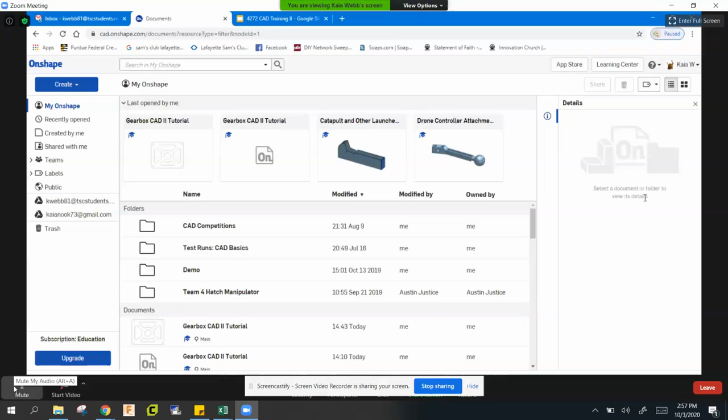So I'm probably going to talk a little bit faster than I did last time, which is fine. And so you can just rewind or rewatch anything if you ever need to do that. And I'll also show you some resources if you need help or if you want to go over keyboard shortcuts. So today we'll be making a plate, pocketing, creating a drawing, and making a small assembly.

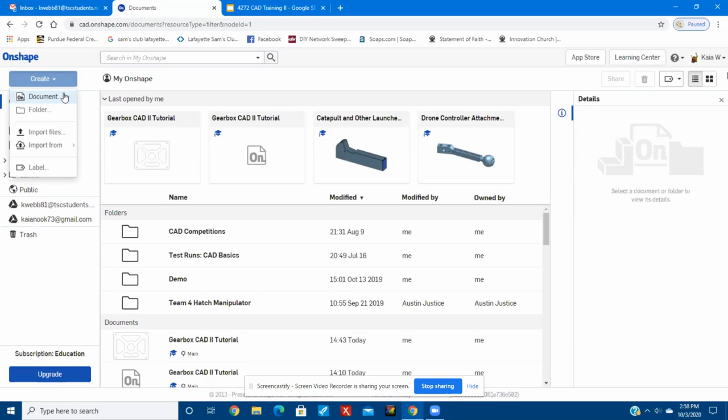First of all, you're going to click this create button up here and go on to document. And this is of course after you've logged into Onshape. So naming is, as I mentioned last time, very important because you can navigate your document, you can understand the purpose of your parts, you can communicate effectively, and you can organize your exports. And by exports, I mean if you save it into your computer, it's going to have the same name as you had in Onshape, which is going to be really easy if you organize it in advance.

So now I'm going to name this Gearbox CAD 2 tutorial. And this effectively communicates its purpose.

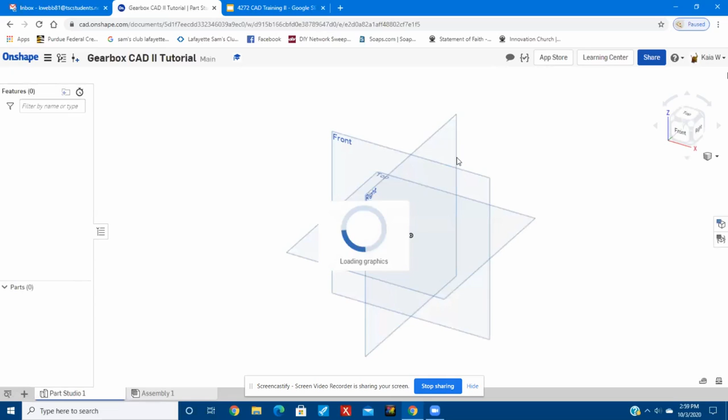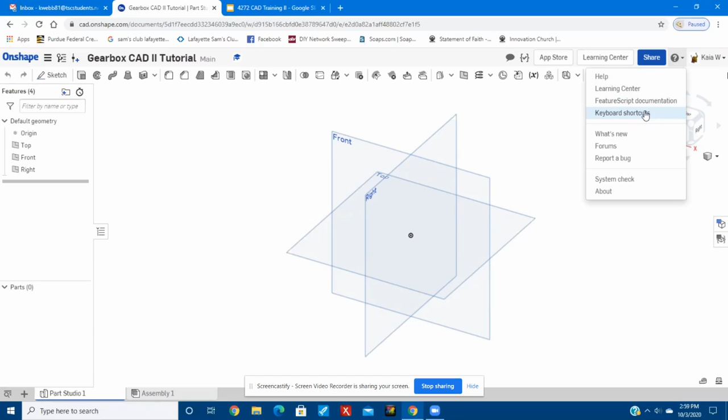And if you don't remember something, there's this little drop-down menu with the question mark in the upper right-hand corner. There's a help thing, which basically tells you everything you could ever need to know about every tool in Onshape. And there's a learning center because Onshape provides its own tutorials. There's also FeatureScript, which you'll probably learn about at some point during build season. And then there's keyboard shortcuts, which are really useful because then you don't have to find the button every time.

What you're going to do now is make the plate in your part studio. So click this sketch button, and then you'll click, I like to use the top plane. Then you'll find top on your cube in the upper right-hand corner, and that'll reorient your view. So now you have kind of a piece of paper. So you'll click this corner rectangle, and you'll click on the origin. I like to have things on the origin just so it defines itself.

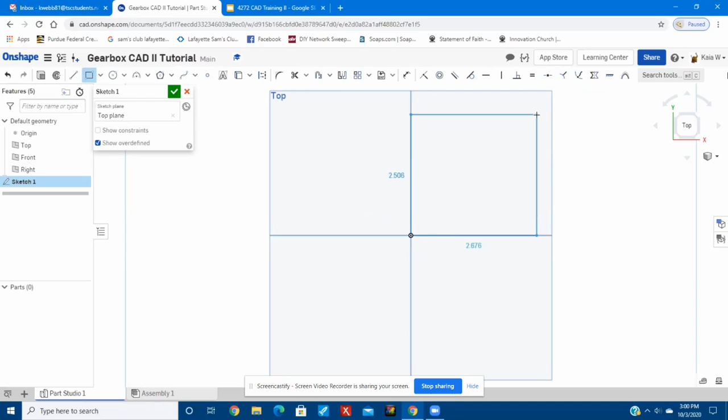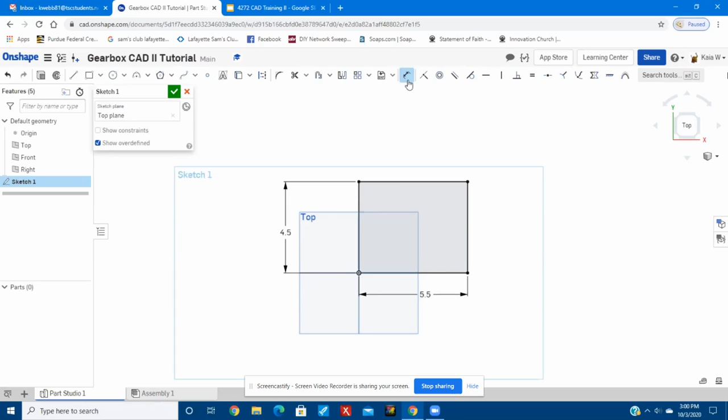And then you're going to make this 5.5. And this 4.5. And if you don't remember, the dimension tool is up here. It's this little arrow thing. So now you have a fully defined rectangle. And you know it's fully defined because it's black.

So now what you'll do is you'll click this center point circle, or you can always click C. And then you'll find the midpoint, which, as I said last time, finding the midpoint of something is just you go along until you find this little box in the middle, and this little kind of character will appear that looks like a point. And then what you'll do is, as I just demonstrated, you don't want to click there.

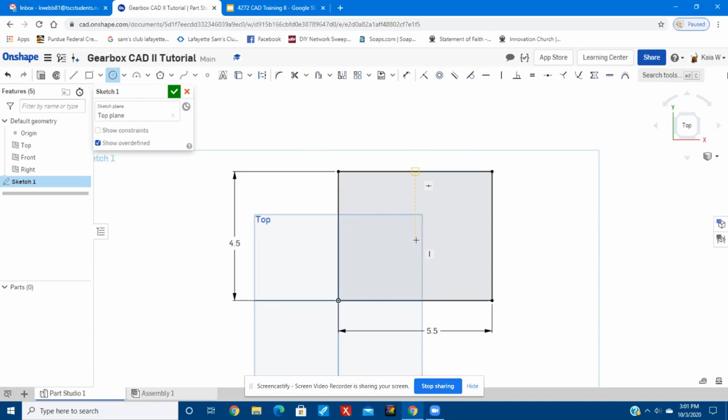So now you'll kind of go down, and as long as that little box is highlighted and there's a line going to your mouse, you can click, and now you have a circle. And then you can drag it up and down, but you can't drag it side to side. So it's centered horizontally, but not vertically.

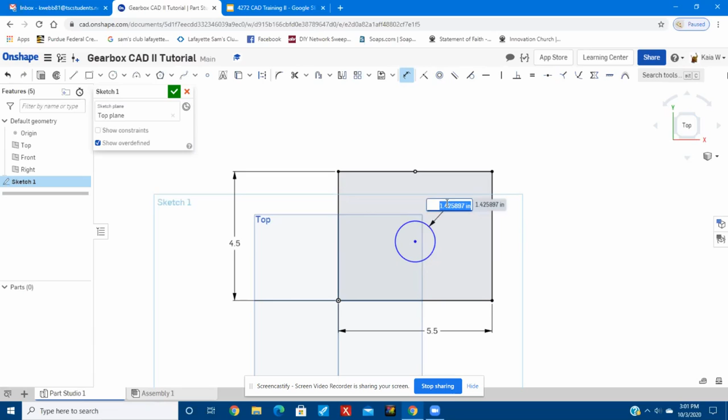So now what you'll want to do is use the dimension tool, and you'll click on your outer edge of your circle, and you'll make that 1.125 in diameter. And then instead of clicking the center point, you'll click the bottom edge, and you'll dimension that from bottom edge to bottom edge of the rectangle to be 1.5 inches, which is very close to what I already had it to. Is it fully constrained? Yes, because it's all black.

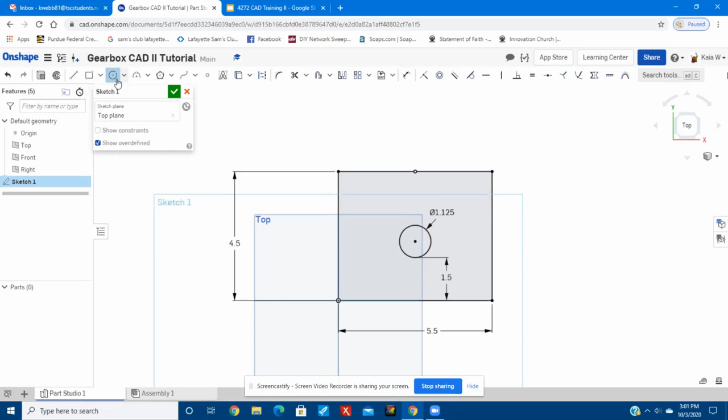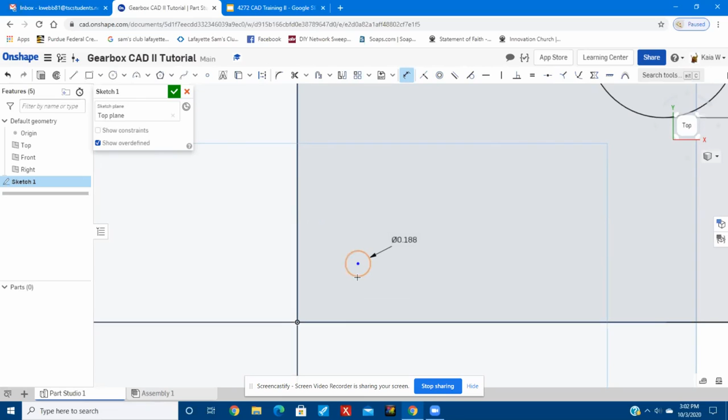So now what you want to do is you click the center point circle again, and then don't make it on the corner, make it somewhere inside the corner. And then let's make this 0.1875, which is the diameter of a screw we have in our shop. It's probably the most common screw size in our shop. Then from edge to bottom edge, I give it a 1/4 inch, so 0.25. And then you'll do that again from edge to side edge. So now we have this circle.

But instead of making this circle in all 3 other corners, you can just mirror it. And what I mean by that is you can kind of reflect it across a line. So what we're going to use as these lines is construction geometry. Construction geometry is ignored when making your sketch into a 3D part, so it's just used as a reference. So this is the construction button, and usually you'll have another tool selected, like say the line, and then you go over to construction, and now you can make a construction line.

I like to use keyboard shortcuts, so I'm going to use L for line, and construction is Q. So you already have this midpoint, so what you're going to do is just click on that, and then go straight down, and it should automatically make it vertical for you. And then see how it wants to make another line for you. Since you're not going to be making another line from this point, you can just click the escape button, and that kind of deselects all your tools.

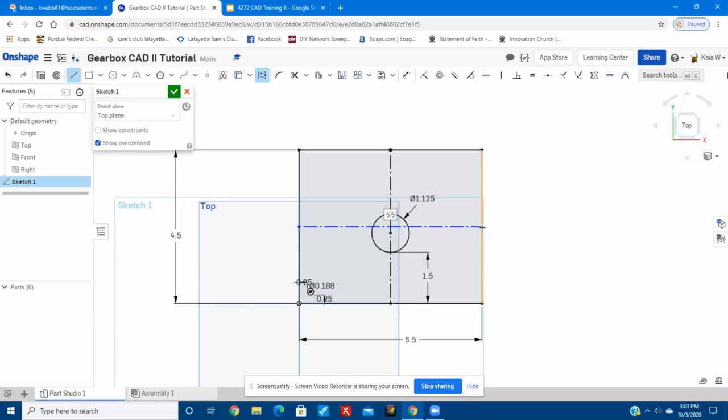So now you're going to make another construction line using LQ or click on these tools. And then you're going to find the midpoint of this side. And then, as you can see, it has it on the midpoint of this other side as well. And then you'll just click escape again. So now you have kind of 4 perfectly symmetrical quadrants of this rectangle.

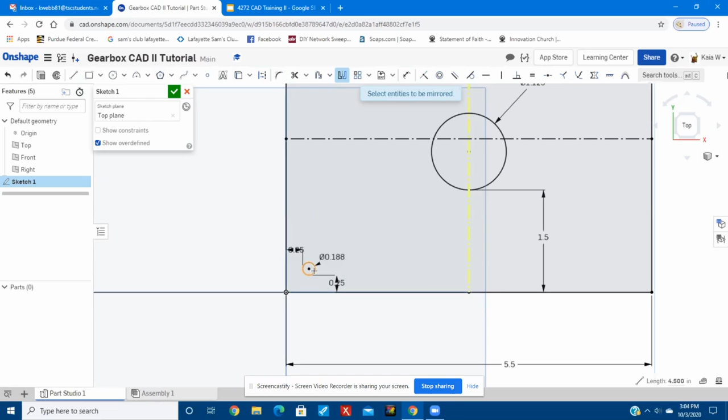So now what you'll want to do is click this mirror tool. And first it'll ask you to select a line and then select an entity, which is just a thing in your sketch, anything. So you don't want to click the point, you want to click the circle because that's the thing you actually want to be replicated. So now you have that, and then you'll click the escape button, and you'll click mirror again, and then you can click this horizontal line. And since you have both, you can do that.

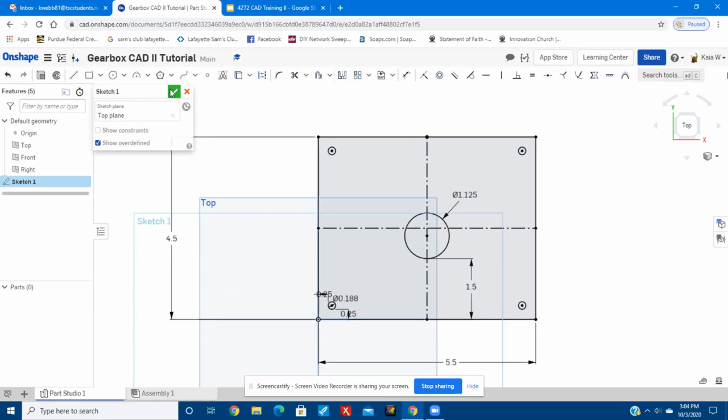And this is only meant for things that are supposed to be symmetrical. So if you wanted this hole to be in here, then you wouldn't be able to do that because the mirror tool would have no purpose in doing that. So now what you want to do is always remember to click the green check mark after you finish a sketch or, let's say, an extrude.

So now you'll click on the extrude button or Shift E, and then you'll click on your face here. And then in this depth field, you want to make it 0.25, which just means 1/4 of an inch thick. So you'll click that check mark. And then generally on parts like plates, you'll want to use the fillet tool, which just looks like a curved corner here. And you'll click on these 4 corner edges.

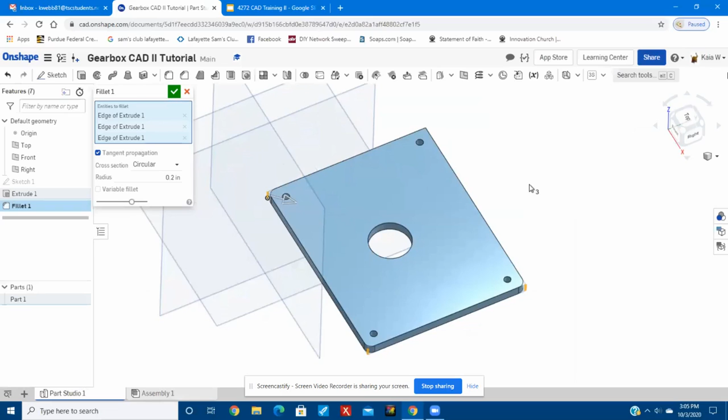And then if you right click and drag, that's how you get it to rotate. And then if you control right click and drag, that's how you get it to pan. So now you want to make sure you have all 4 corners. And I like to use 0.2 because it's just a nice number. So then you'll click the green check mark and you have a part. Now what I'd like you to remember is naming.

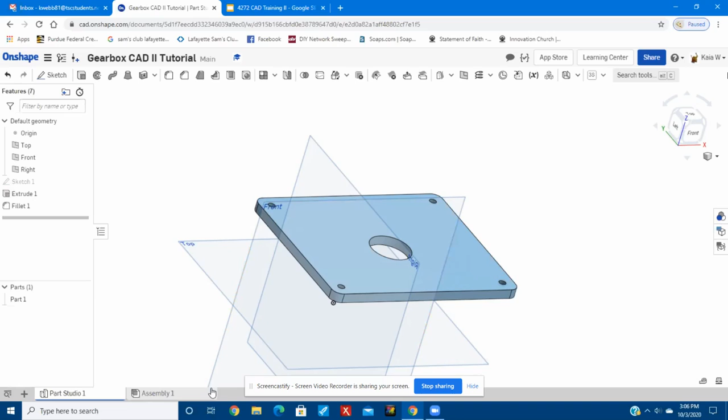So you have the name of your overall file, which includes all of these Part Studios, assemblies or any folders you might have down here. And then this Part Studio, you can technically make multiple parts in this Part Studio. So all the individual parts will show up here. And another Part Studio we're going to make is a Hex Shaft. So you'd probably just name that one Hex Shafts. And then you could make all your different Hex Shafts in one just to keep them together.

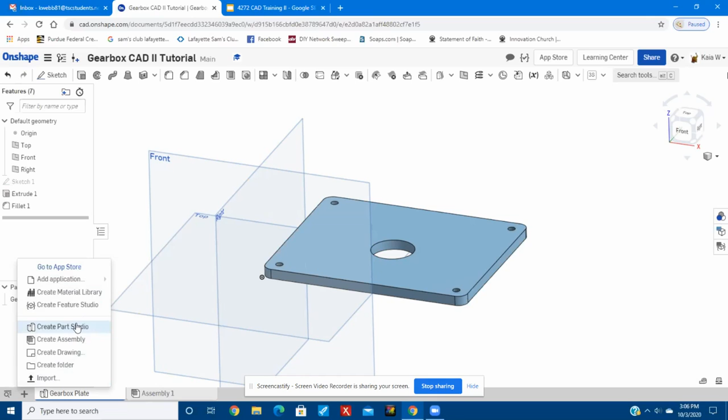But in this case, we just want it to be one thing. So we'll name this one Gearbox Plate. And since it is just one thing, we'll also name this part in here Gearbox Plate. Now what you do is you click this little plus button, which now you can add a new little file in your menu here. So you can create a Part Studio. And then we'll go ahead and name that Hex Shaft. Because in reality, on the team, you would probably be making quite a few Hex Shafts in CAD.

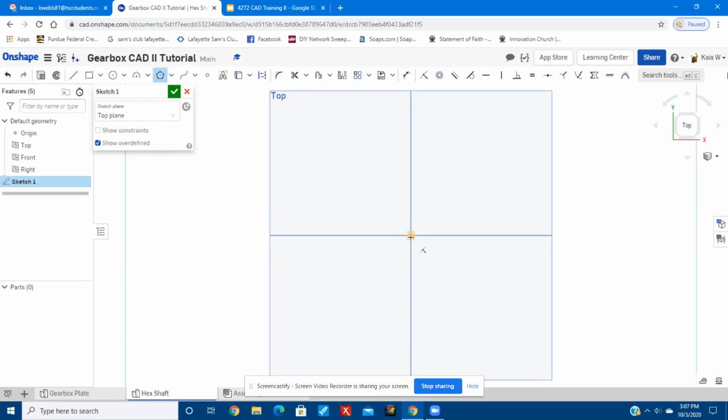So now you're going to click the Sketch button, top, and don't forget to reorient with your little cube in the corner. So now you'll use your Circumscribed Polygon tool and click on the origin. You'll either click to the side or up just to make it easier to define. I like to use up because due to the angle, it's easier to mate in an assembly. So now you'll click, and that little number will appear. If you were to move your mouse, that number would change, and it would change the number of sides. We want it to be 6, so we'll just keep it here.

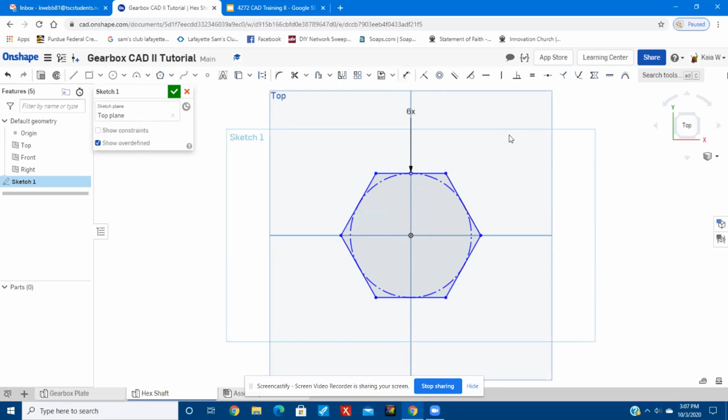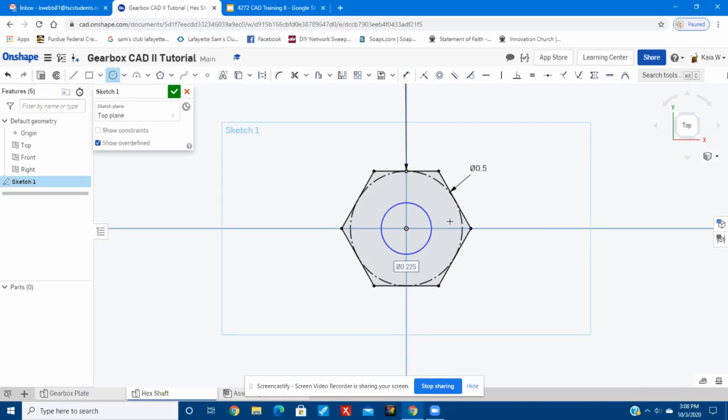And now I like to dimension this circle instead of having to go across, because you can dimension two entities apart from each other, but I just like to use the circle. So we'll make that 0.5, and it obviously got quite a bit smaller. So we'll zoom in, and then you'll make this circle, which will be the hole for the bolt to go through, because we're using this to attach two of our gearbox plates. So now we'll dimension this to be 0.1875. So now it's fully defined, so we can finish our sketch with the green check mark.

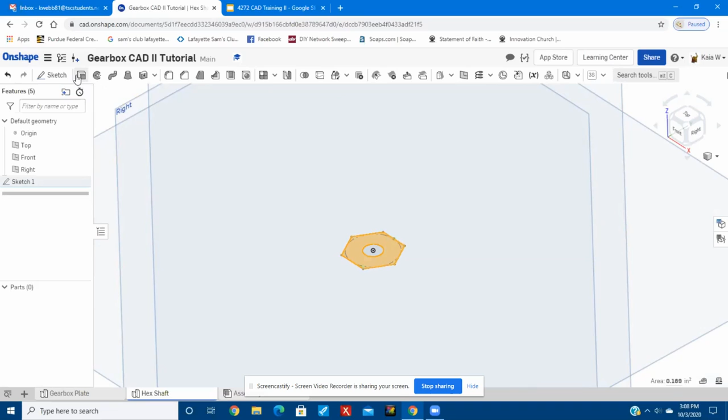And now we have this little hexagon. We can click on that face and click extrude. And then we want this one to be 1.5 inches long. So go to the depth field and type in 1.5.

And I'm not just using random numbers here. So let's look at this part as an example. Most hex shafts we have are 1/2 inch across. And to find length in Onshape, you can click this. So now you know the length of this one line is down here.

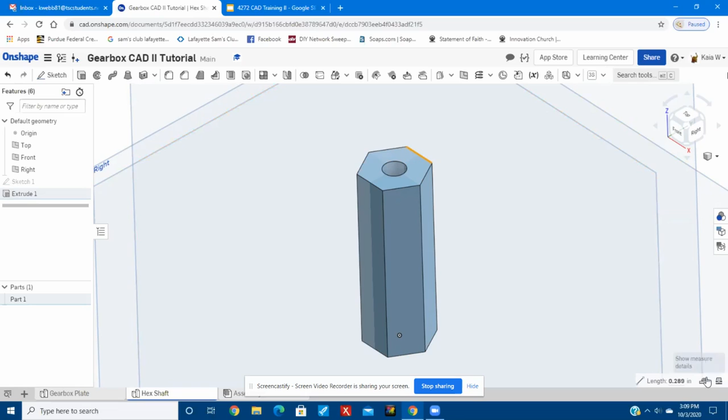And then you can also have show measure details. And then if you were to click another line, it shows the distance between 2 points. So in the event that, let's say, you have a point over here and then a point over here, it would show all those different ways you can measure it down here. So let's exit out of that. And then to deselect everything, you can just click space.

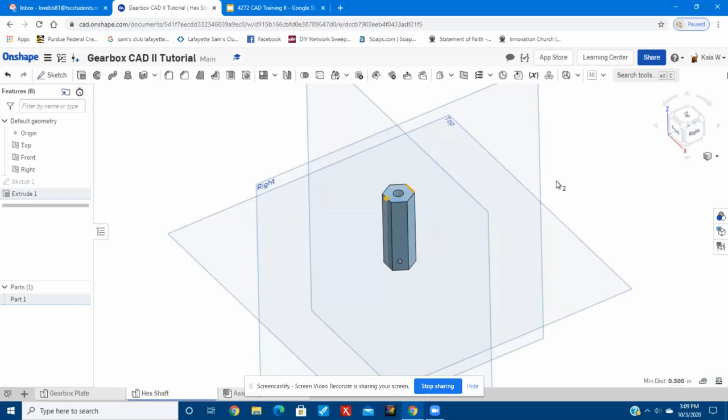And then a very common screw size in our shop is 10-32, which is 0.19 inches in diameter. And this is 0.1875, which is very close. And then 1.5 is approximately the amount of space between the plates in your gearbox I've actually made. So that's what this is for.

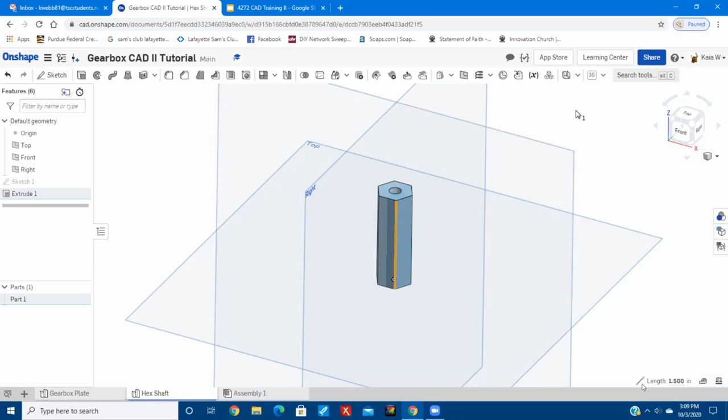Now, let's move on to our assembly. So usually, if you were doing this, you'd create a new assembly. But since we have a very small file, you're just going to go to assembly 1. Now we're going to go ahead and name this gearbox assembly. And you never want to leave something unnamed, because that'll get confusing later.

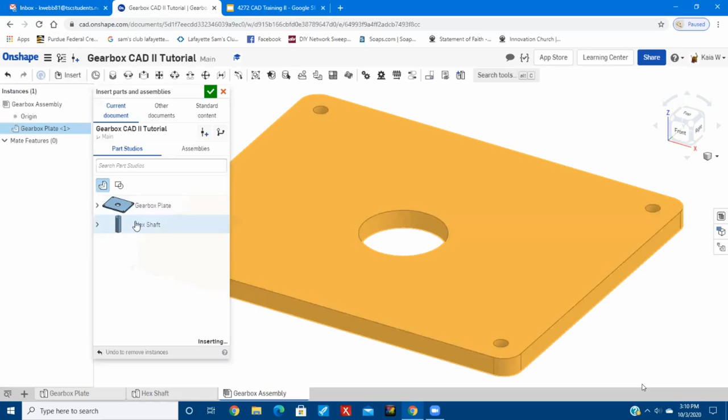So now you go to this insert button, and you'll click your gearbox plate and your hex shaft, which just inserts them. A lot of people like to click and then put it in there, and click and put it in there. You don't necessarily have to do that. You can also drag your parts around.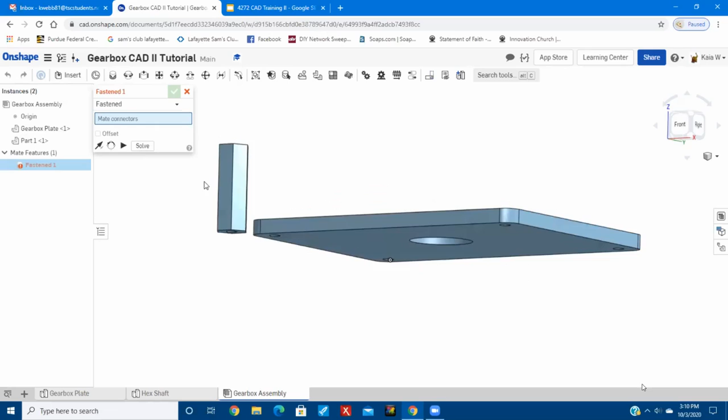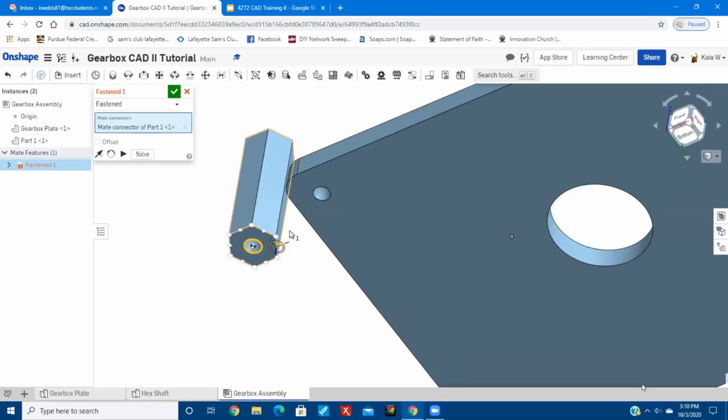So now what I want you to do is use fasten. You're going to scroll into the bottom of this, and instead of having it on this face like I do, see all these little dots? That means it's actually the face. What I want you to do is highlight just this circle, and I'll tell you why in a minute. And you want the colorful icon to be in the actual center of that. So now you'll kind of scroll out and show the top; you can really use any corner. So now use this circle, and you'll want to highlight that edge.

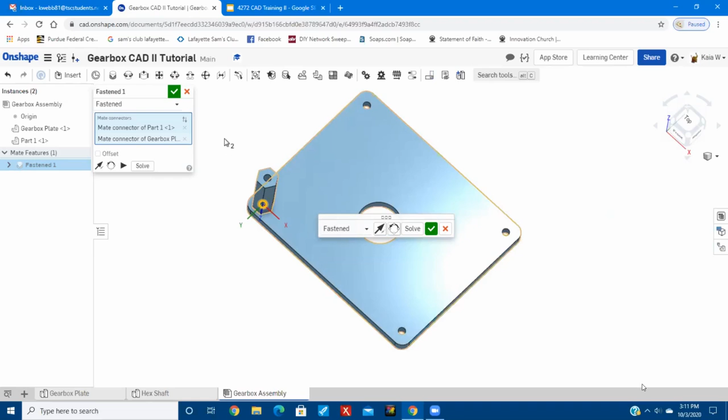So I like to click solve just to make sure everything looks right, but generally in really small assemblies, solve won't do much, but I like to make it a habit. So if you can do that, go ahead and do that. So now we could just take this and insert it 3 more times, or you could just replicate it, which is this little pegboard looking thing up here.

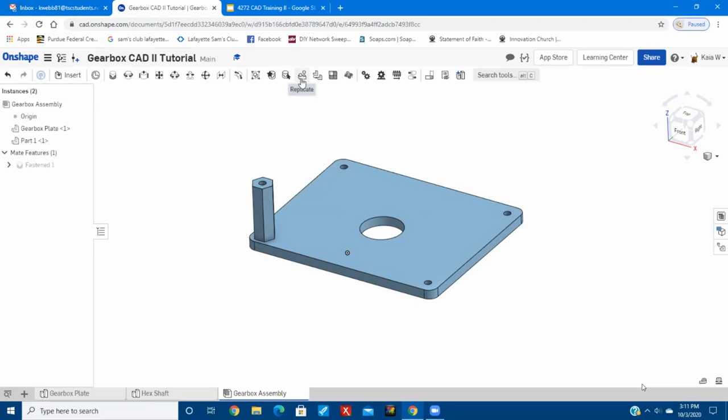So now we click on the thing we want to make multiple times, and it has match edges on face, and that is why I had to click specifically the edge. So it's going to only find the circles that are the same dimension as the thing you already mated it to. So if I had just done it with the face, then it would have said, oh, you want to mate it to all circles. So it would have done this big one too. And it really wouldn't be an issue in this one because you could just delete that one.

But if we have a more complex part, like say the plate on the side of our shooter, it has a lot of holes, and it would probably be even more time consuming just to go through and make sure you only have one on all the holes you want.

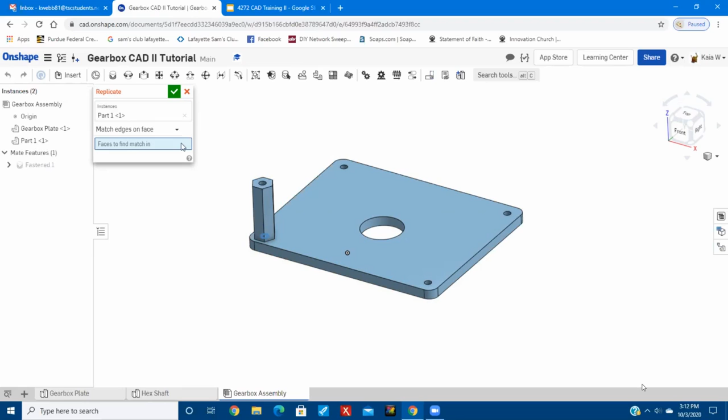So now you'll see this little red field, and you click on that and it'll turn blue, which shows that now you want to select stuff for that field. Then you'll click on that face, and as you see, it replicates all of those, and if you drag it around, they will stay.

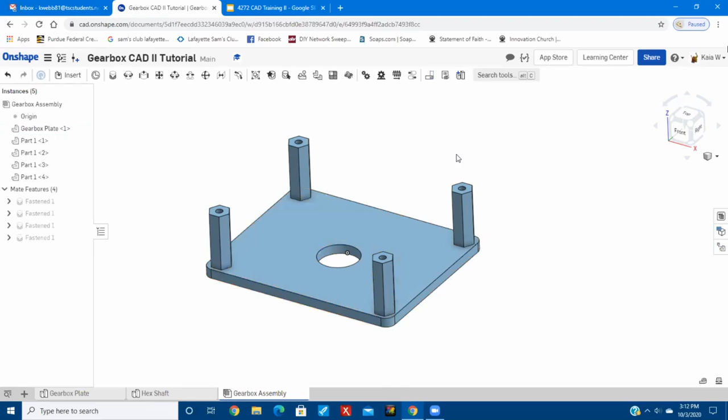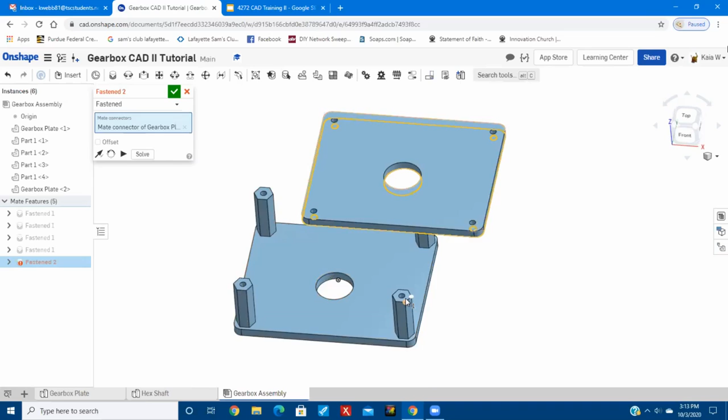So Control C and Control V work in here too. So you're just going to select this, Control C and Control V. And this time when you mate it, you'll want to mate it to corresponding corners just because it goes on a specific way. And this time it doesn't really matter whether you choose the edge or the face as long as this icon is in the correct place. So now since I'm on this corner, I want to use this hex shaft. So then you'll click the green check mark, and now you have your assembly.

Next, I'd like to talk about pocketing, which is basically when you remove material in strategic places so that the part remains mechanically sound. It prevents a thing called Operation Swiss Cheese, where your team near the end of build season realizes, oh no, our robot's overweight, because there is a weight limit. And so they start just drilling holes, and there's no pattern to it, and that's very bad. So this keeps us under the weight limit while still making our part fully functional.

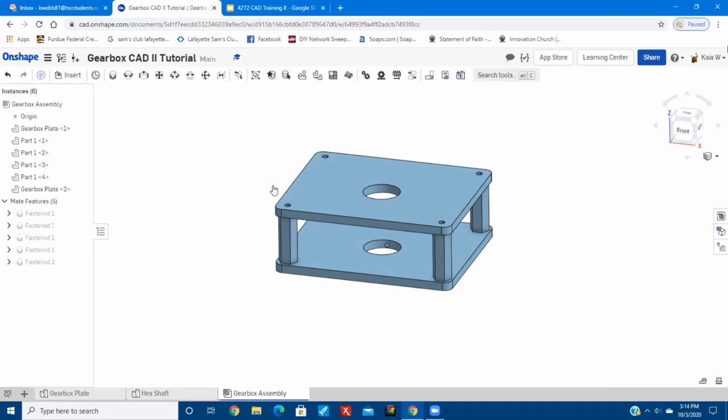Now, go back to your plate, and instead of just picking a plane, you're going to click Sketch and then click onto its surface. And then don't forget to reorient your view. So now, you can use this little offset tool here, and then you could just click around all the edges, but what I like to do is if I'm using the face of the whole part, just click on the face of the whole part.

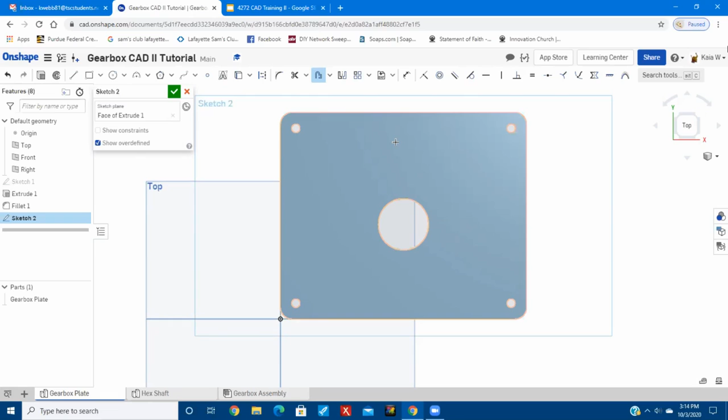And this arrow should start pointing inward. If not, just drag it inward. Then you can either click out here or just press enter, and the little field will come up for you to enter a number. If it's not 0.25, make it 0.25, and if it already is, just press enter, and then it'll be good.

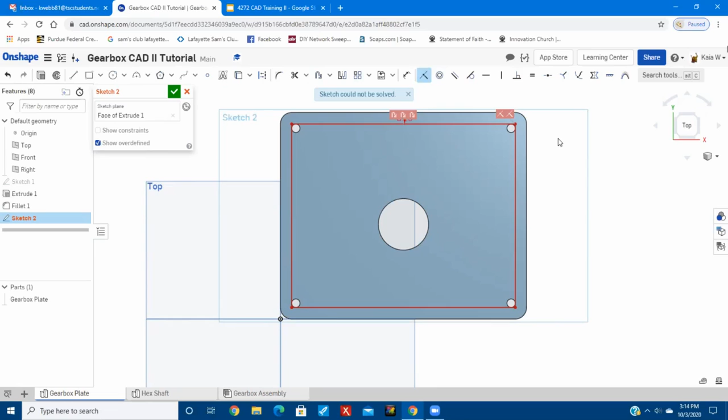So now I'd like to talk about breaking a sketch, which is when, and don't actually do this, I'll just show you what happens. See, your sketch turns red and little red icons appear. First of all, don't freak out. Just Control Z, which is the undo button, and try whatever you're trying to do again, because maybe you just accidentally clicked something and you don't even realize it. But usually you have kind of a conflicting constraint you put on it.

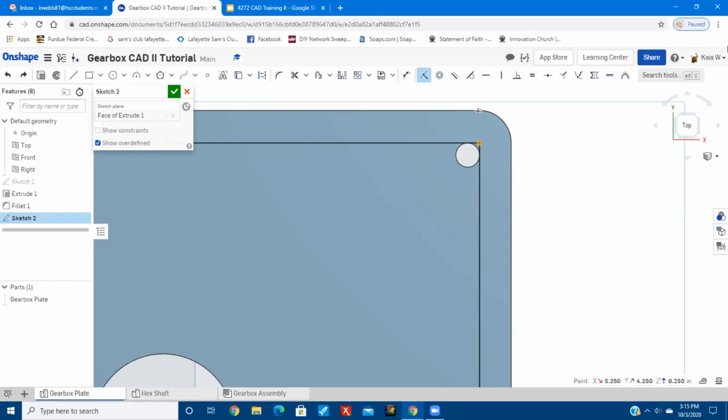So I'll show you what I did here. So this is the coincident tool, that means that you always want two things to be touching, such as this point and this point. But the offset tool we used earlier says that this line will always be 1/4 of an inch from this line. And so these points can never touch. And so I've told it two completely different things. So that's why it breaks.

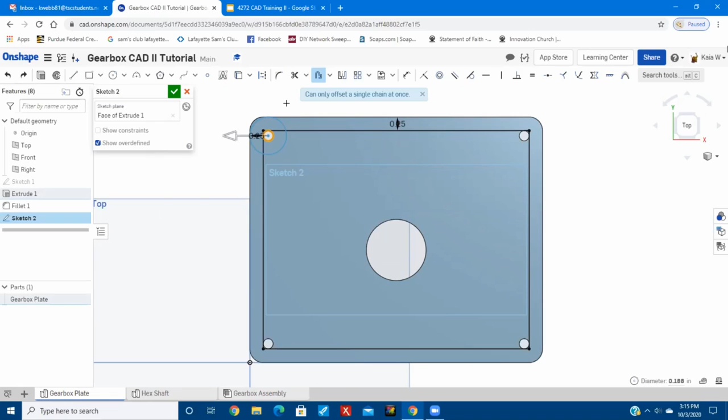Now you'll want to create a border around each hole. I like to use offset for this. You could technically make a hole over each one, but this kind of just streamlines the process. And you can't select multiple at once because it's not technically a single chain, as Onshape puts it. So it's basically not a closed loop, if you think about it. And then you'll press enter, and you'll want that to be 0.25. So you just go ahead and do that for each circle.

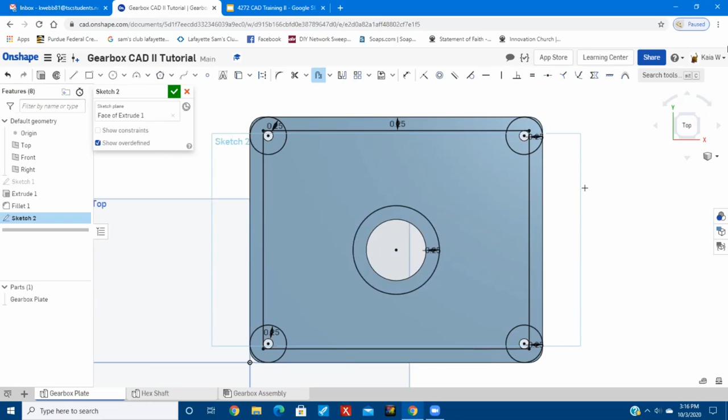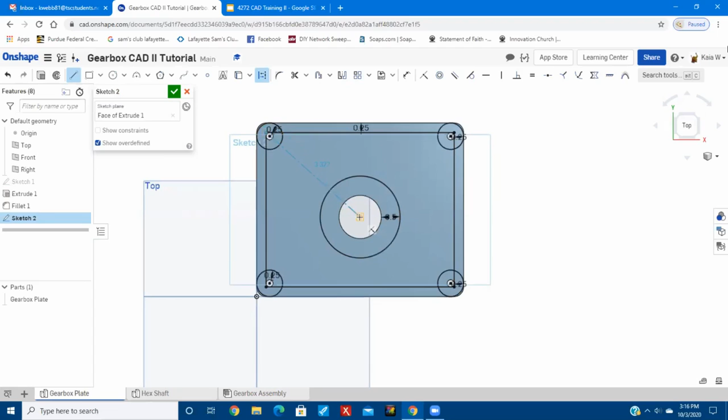And then for this big circle in the middle, since it's kind of a more load-bearing part, I would say 0.5, just to be safe. And then next, we are going to use construction geometry. So I want you to click LQ on your keyboard, which gives you a construction line. And instead of just using the center point or somewhere random, use this corner from the offset, and then you'll go to the center, and then you'll do that on each corner.

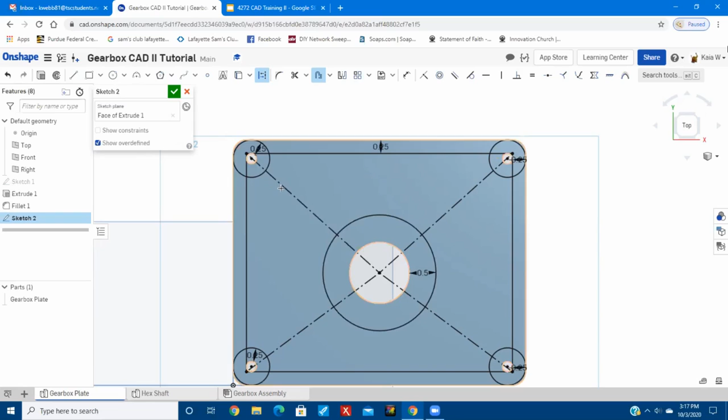So once you do that, it should be fully defined. And now because you went to each corner, you kind of completed that closed loop needed for an offset. So now you have kind of these 4 triangles. They make 4 areas of the sketch. So now you can just click on each one of these, and see how I have it construction. You don't want it to be construction. You want these little blue lines to be solid.

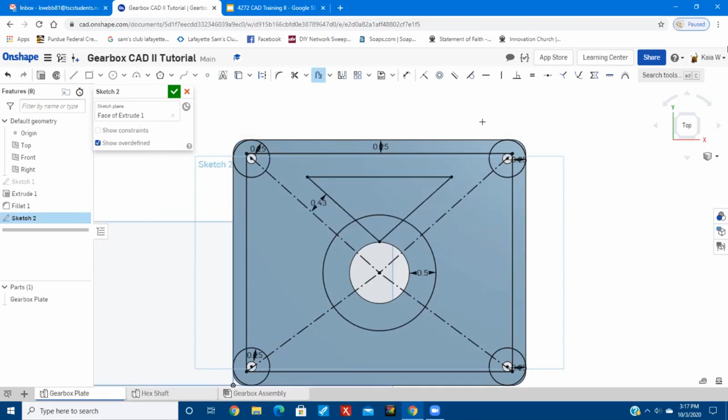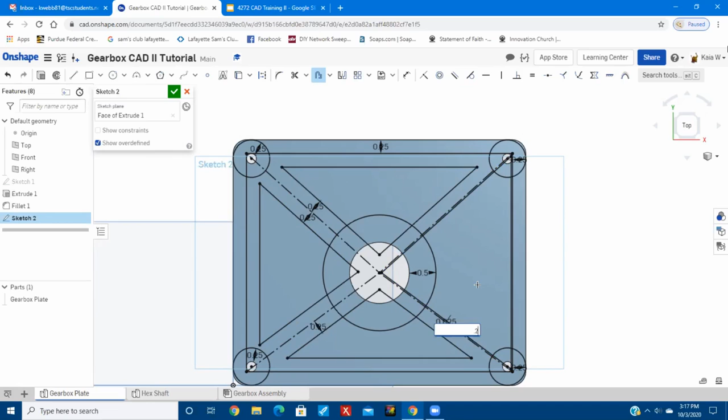So see how this starts on the outside? You're always going to want this to be on the inside of that triangle you just highlighted. So you'll click enter, and then you'll want it to be 0.25, because then if that's on each side, that'll add up to be 1/2 inch, which is about what we want. So go ahead and do that. And sometimes it'll end up inside already, and sometimes it'll end up outside. You just want to make sure that it ends up inside. See, so this did it again. And now you should have something that looks like this.

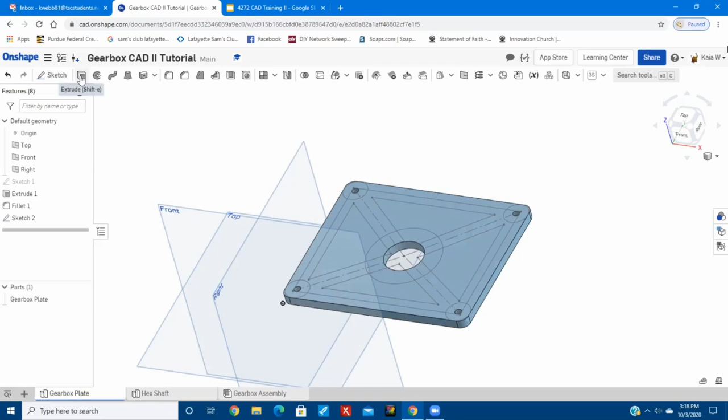So then you'll have these 4 little regions here where this material is really not supporting much. So now you want to click the green check mark and we're going to remove this material. The extrude button doesn't just add material, it also removes material. So you're going to go to this remove tab and you'll click these little regions that aren't really supporting much.

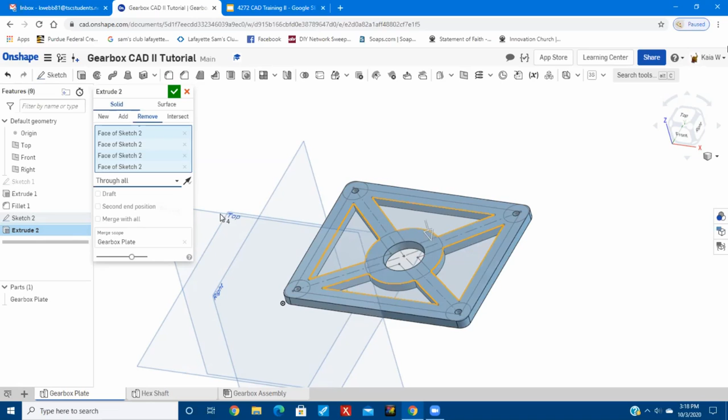And then there's a little drop down menu under the word blind. You'll just go through all, since this is the only part in the part studio. And it should look like this. And you'll just click your green check mark.

And now if you think about it, this part will end up being made out of metal. And how we do that is we have a CNC, which is basically just a giant table with a drill bit coming over it. So if you think about the drill bit coming in this way, a drill bit has a diameter, it's round, so you're never going to get these perfect corners. So the machine just won't take that.

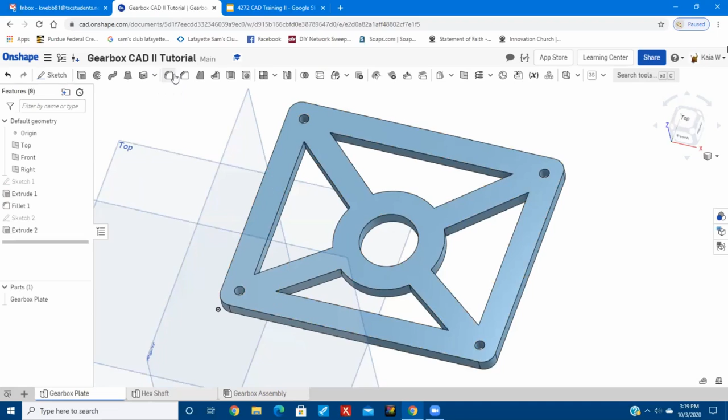So now you'll want to use the fillet tool, which is Shift F. It looks like this little rounded corner. And you'll want to go to each of these inside edges and just go ahead and fillet them.

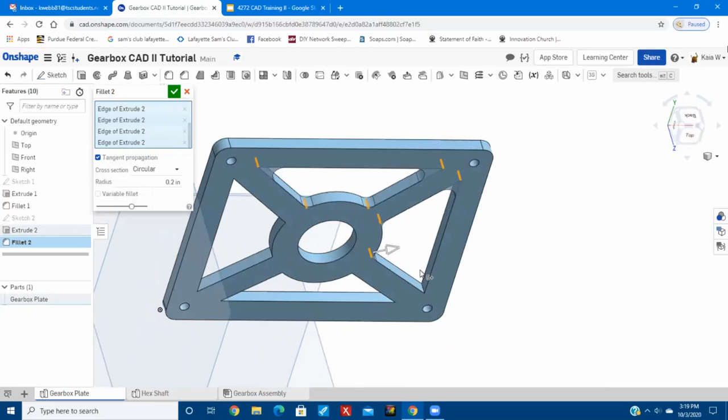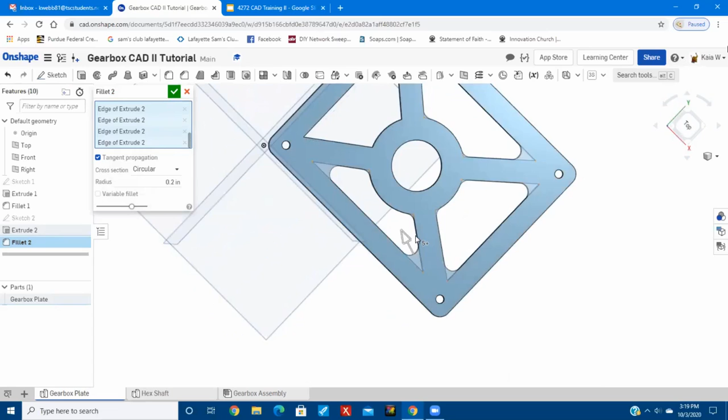And there's also something called a feature script for this, where it makes it a lot quicker in the event that you want all of your inside edges to be filleted, or I should say all of the edges on the part. But feature script is a little more advanced than I wanted to go. So if you'd like to learn more about feature script, that is in the help menu over here. It's basically a way for Onshape users to program their own tools if they think that they could streamline the process of CAD more.

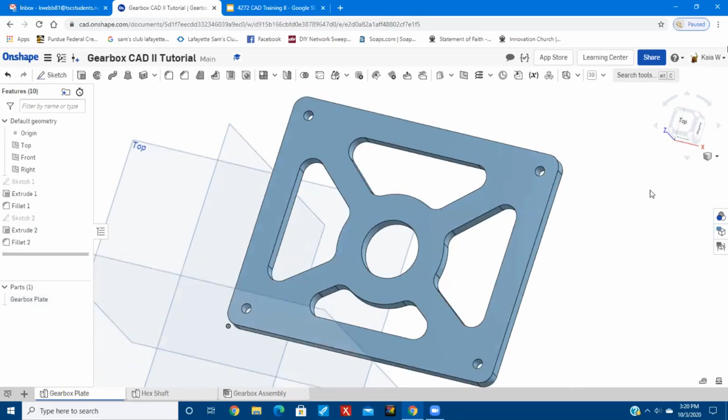And like I said, I like to use 0.25 just because it's a nice number. So now you have this pocketed part and it would be ready for the CNC. So if you go back, all CAD software should do this, but at least Onshape automatically updates the part that you already have in your assembly. So now you have this pocketed part in your assembly.

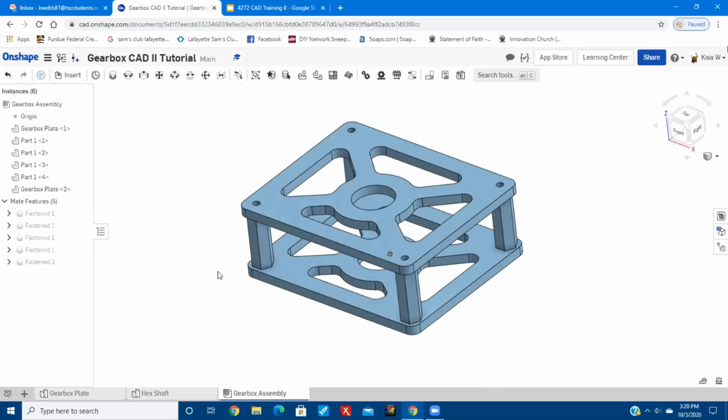So now I'll show you how to get it ready for the laser cutter, which is something that a lot of people ask you to do. Getting it ready for the CNC is a little more complex, but the laser cutter is something we use to prototype first before we actually start making it out of metal. So you're going to click the little plus button, and then you go to create drawing.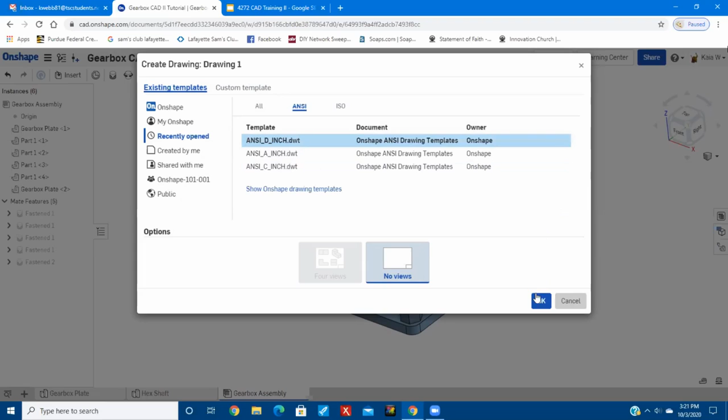And then, if this doesn't show up, you'll want to click ANSI, and you'll have a little D here. That's the one that you want to use, especially for bigger parts. You could get away with the A and B and C for this particular part, but we just like to use D. So now an insert menu should come up, and you're going to click on that gearbox plate drop down, and you'll click on that part in that menu.

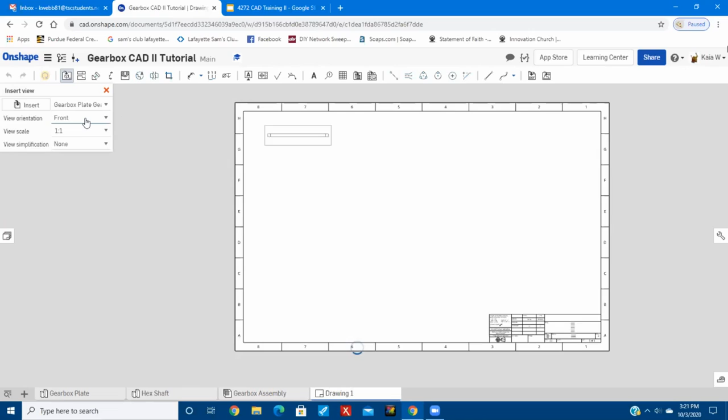And depending on what plane you originally set your sketch in, you're going to need to go over here and probably click top if you've been doing exactly what I've been doing. So now you're going to click, and that's going to put that in here. And then see how this little box follows you around? This feature is technically used for engineering drawings, so that's what it's going to do. But you're going to click the escape button because we're using it for a different purpose.

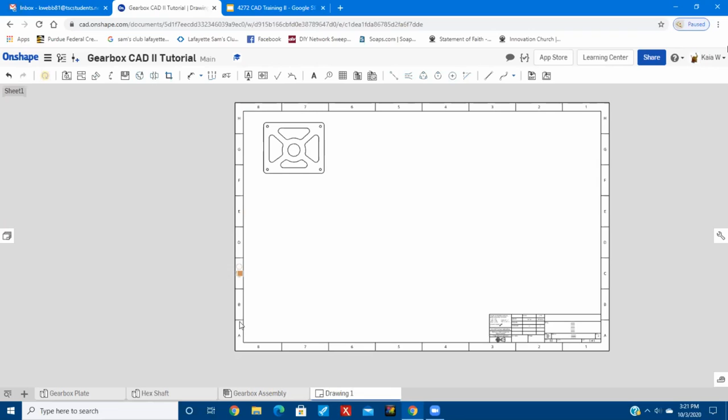And all this stuff up here, the laser cutter would actually try to cut this out. So we're going to need to drag this off to the side of the paper, and you'll zoom out, and you'll highlight your entire paper, and everything should turn orange, and you'll just click backspace. So now you just have this blank sheet of paper.

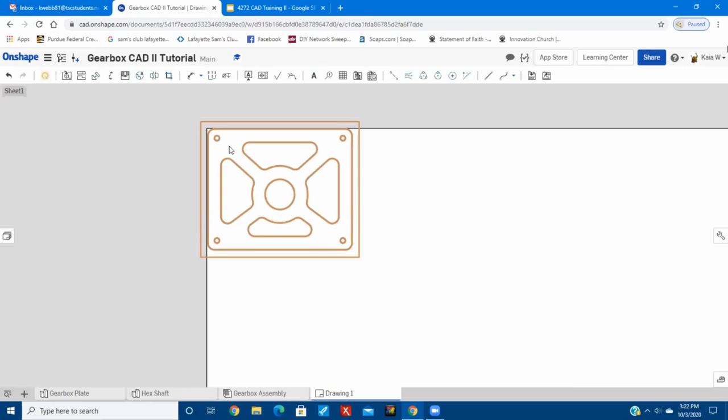Then what you want to do is you'll drag this up to the corner, and you'll put this as closely to the corner as you can. You'll want to leave a little room, so you can't just do this. You'll want to leave it about here, because if you just put it somewhere in the center, you're going to be wasting wood. You'll be wasting materials.

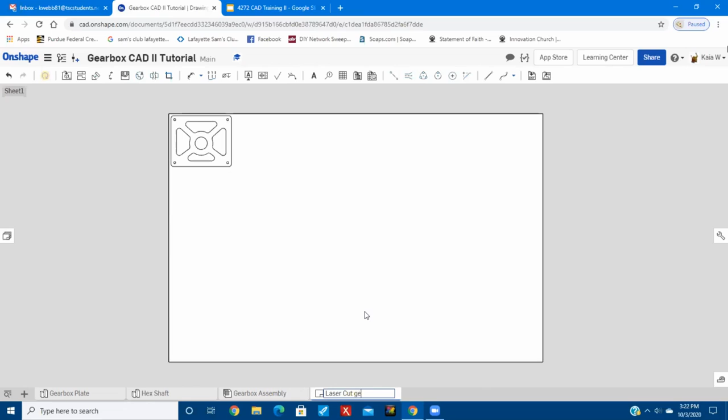So now you have your drawing, and don't forget to name it something like laser cut gearbox plate. And I like to capitalize things just for standard's sake. So now you'll enter that, and now you have something that you could turn into a PDF, and then you'd put that into the computer and send that to the laser cutter. But for now, we're just going this far.

So thank you so much for coming. Hopefully this has been very informative. Hopefully you've learned how to streamline your process more with stuff such as pocketing and replicate, which are all very useful. And just as a reminder, in any document, you can go to this help menu, and you can also go to the Learning Center, which provides, as it says, courses and training resources.